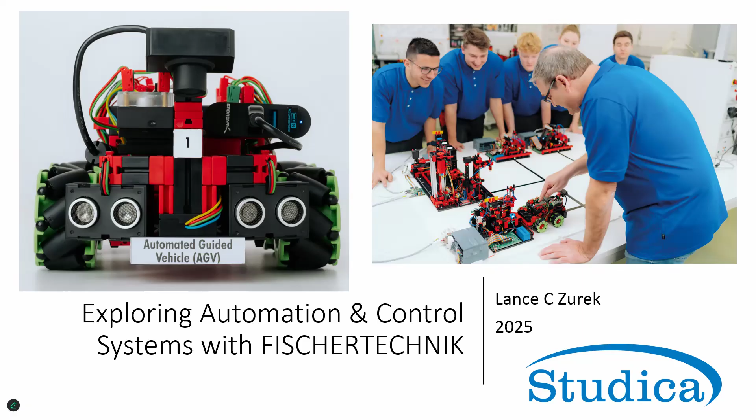My name is Lance Zurek, and I am the product manager for the fischertechnik Education Division over here at Studica. And of course, today I'm going to provide you with an overview of fischertechnik's line of pre-assembled industrial simulation and training models, including some of the very latest models, which are incorporating new cutting-edge technology.

Now, over the years, I would typically begin these presentations with a discussion of the importance of STEM education, and I would talk about things like the changes in the manufacturing environment, and of course, the growing need for highly skilled workers in the modern workforce. But at this point, I think it's pretty well established just why technology-focused education is so important.

And so with that, I'm going to basically dispense with most of the preamble and try to jump more into a discussion of what fischertechnik is and also show you each of the current models that are available in the simulation family.

Just to give you a little bit of background, fischertechnik simulation models have been designed with the intent of providing a compact, engaging, and hands-on method for teaching and demonstrating high-end automated systems. The line consists of a series of pre-assembled small-scale models which are designed to replicate both in appearance and in function various automated robotic machines and systems that are commonly used in commercial manufacturing.

Now, before we look at those models specifically, just to give you a little background on what fischertechnik is and who they are, fischertechnik has been creating tools for teaching students of all ages how technology works for 60 years, all based around their unique building system.

Now, what makes this system unique is that unlike other popular construction systems, and you see an example of their block here, with most popular construction systems, they're designed simply to stack, but the fischertechnik system is all built around a core building block that allows attachment from all six sides. And because of this, it allows for almost limitless design possibilities.

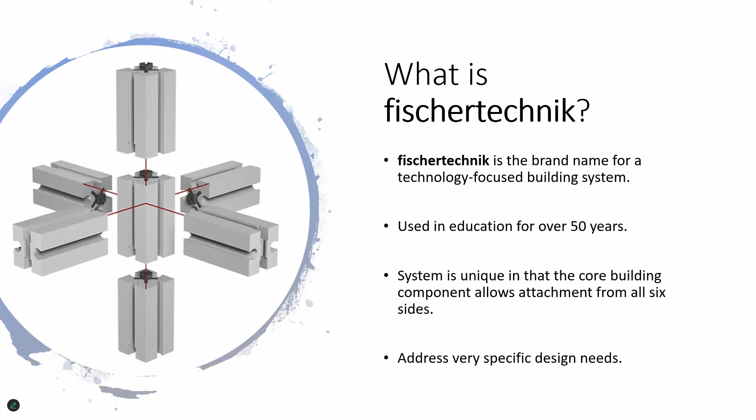The system itself was created back in the 1960s by German inventor Arthur Fischer, who, of course, the company is named after, and he's noted for countless innovations used in the construction and the automotive industries. Just to give you a couple of examples, Mr. Fischer, at the time of his death in 2016, held more patents in his name than Thomas Alva Edison had amassed during his own lifetime.

Now, prior to creating fischertechnik, Mr. Fischer was first noted as the inventor of synchronized flash photography. This was in 1949, and a few years later, he gained fame as the creator of the expanding nylon wall plug, which is used in conjunction with a screw or a bolt to help anchor heavy objects to walls. Anybody who's done anything with a house has probably worked with these.

His company, the Fischer Group, continues to employ thousands of workers all around the globe who produce many variations of fastening devices, used in building construction. Up until recently, they were also involved in producing components used in the automobile assembly process. And right now, they're very much involved in providing consulting services to companies who wish to employ state-of-the-art manufacturing processes.

Now, once again, the focus of fischertechnik building sets, and that's whether those intended for the retail market or for classroom use, has always been on helping to foster an understanding of technology and just how things work. Many of the products offered by fischertechnik for the education sector are what we would sometimes refer to as subject-specific sets, focusing on different STEM-related topic areas, things such as mechanics, pneumatics, renewable energies, robotics, and so on and so forth.

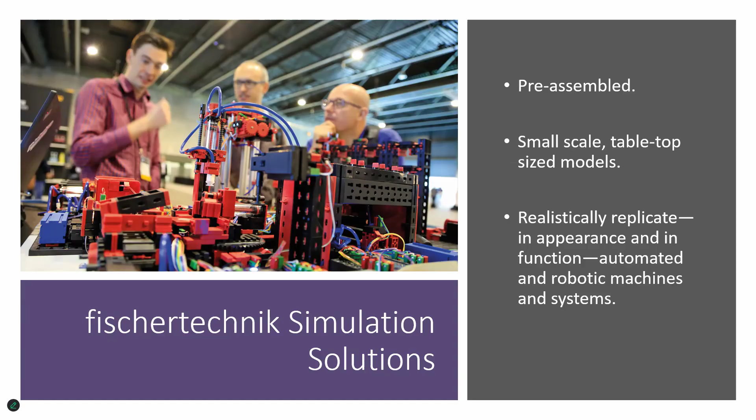These are a series of pre-assembled small-scale models, which again are designed to replicate in appearance and function various automated robotic machines and systems. This will include things like conveyor belts, punching machines, three-axis pick-and-place robotic arms, color sorting lines, and even high bay warehouse storage systems.

Now, besides these individual models, which will of course focus on specific processes, fischertechnik now also offers several variations of an integrated factory simulation model. And what you'll see with these factory simulation models is that they'll most often consist of at least four individual workstations, sometimes more. And what you'll commonly see is some sort of a gripper robot, a robotic arm, a high bay warehouse system, a multi-processing station with an oven, and a sorting line with color detection.

And in the case of these factory systems, they're designed to all work together as one self-contained material cycle. And of course, we're going to look at these a little bit later in the presentation. Now, before we get into the specific models, let's briefly outline some of the advantages of using fischertechnik simulation solutions.

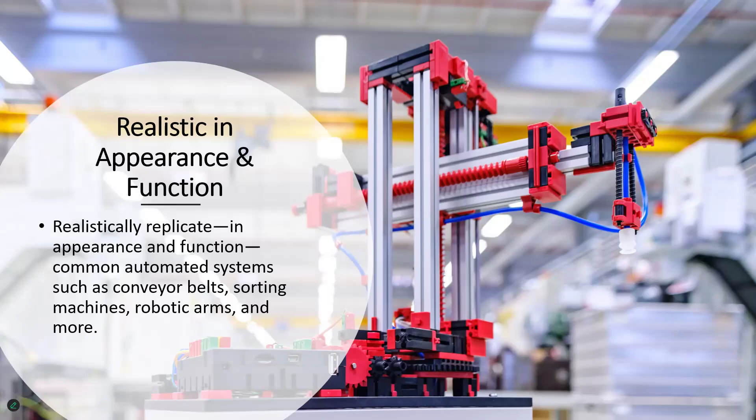First off, fischertechnik simulation solutions allow educators to offer engaging, hands-on tools for teaching, exploring, and understanding various aspects of automation and programming. Now, this can be for understanding, let's say, how automated systems work, or perhaps for having a tangible physical system to observe and work with in a programming or PLC-focused learning environment. The models, once again, are designed to realistically replicate in both appearance and function common automated systems. Again, things like conveyor belts, sorting machines, robotic arms, and so on.

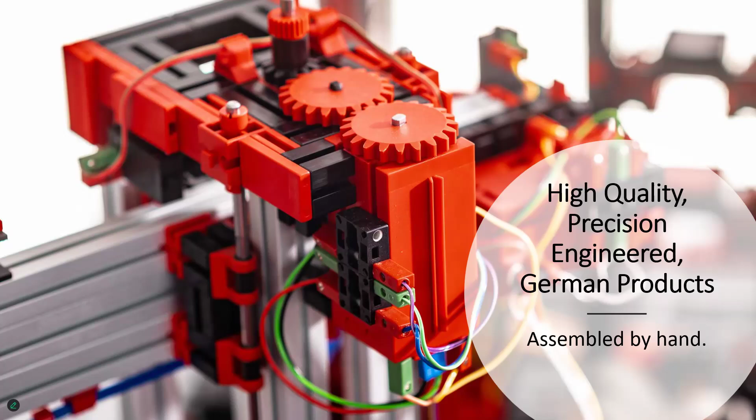Because the models are compact and in most cases tabletop size, they're not only ideal for use in the classroom or in office demonstrations, but they're also great for demonstrating software or other technology-based offerings in a trade show environment. Next big one is quality. Each fischertechnik simulation model is a hand-assembled, high-quality German-made product.

Each of the models, or I should say 99% of the models we're going to be looking at here, are available in 24-volt versions for industrial users, and there are some select models that are available in 9-volt versions as well for those who aren't versed in the use of PLCs, or that's maybe not the focus of what they're doing.

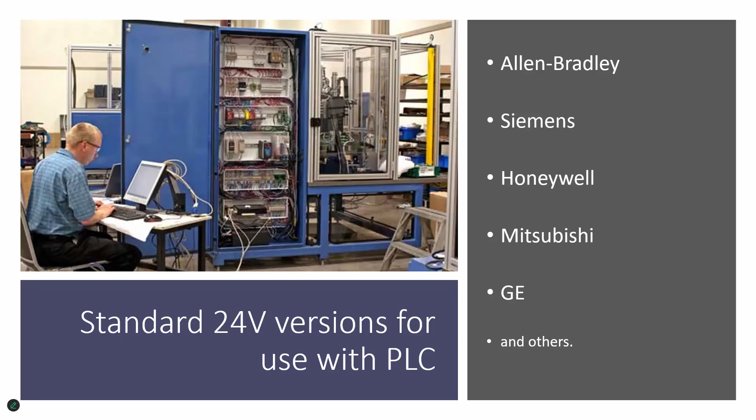The 24-volt versions, again, are designed for use with industry standard PLCs, and it doesn't really matter whether you prefer Allen Bradley controllers, Siemens controllers, or controllers from companies like, let's say, Mitsubishi or General Electric or what have you. In any case, you can use the controller of your choice with these 24-volt models. Likewise, just as you can use your choice of controller, you choose the programming language that's going to work best for your needs.

Now, do note that with many of these 24-volt models that we're going to be looking at, at least in the early part of the presentation, the PLC is not included. The programming is not included, and any additional wiring or connection boards or things of that nature are not going to be provided with the models. There will be exceptions to this when we get farther along in the presentation, and this will be some of the more elaborate variations of the training factories, the factory simulation models.

But in the beginning portion, when you're looking at some of these specialized stations, again, those will require that the end user has to provide their own PLC. They're going to have to create their own programming, the wiring, the connection boards, what have you. So please just keep this in mind, but of course we'll address it as it comes up.

Now, as I mentioned, we've got select 9-volt versions available. If you're not involved in industrial use, the 9-volt versions are controlled by the RoboPro graphic programming software, which is fischertechnik's proprietary software, and they use fischertechnik robotics TXT controllers. So if, for example, you are not interested in getting into programming PLC languages, and you want to work with something that's a little more accessible, let's say for a high school CTE program, the 9-volt versions would probably be a better choice for you.

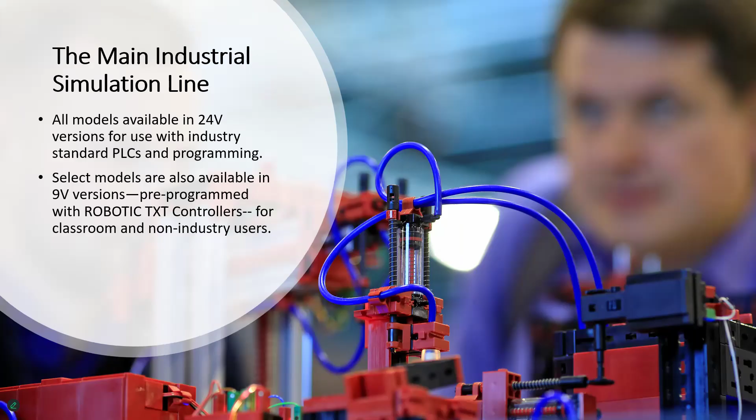So with that being said, let's look at each of the models which are currently available. Now, we are going to begin with a look at some of the more basic modules, and we're going to work our way up to the more sophisticated models, things like the factory models, which I touched upon, which again will include several workstations designed to work as an entire production cycle.

And so we're going to start off with a basic conveyor belt. This is a transport belt with a length of 275 millimeters, and it's used to transport work pieces that can have a diameter of up to 29 millimeters. If you wish, you can connect multiple conveyors to increase the length of transport as desired. There are instructions that come with that. Components on this model will include an encoder motor, a push-button limit switch, two phototransistors, and two LED light barriers.

The dimensions of the model are approximately 14 by 10 by 4 inches, and it has a weight of just about 2 pounds. It's available in a 24-volt version with a multi-pin connector. I'll mention the specifics: it's a 26 pin with a 2.54 millimeter grid, as shown here. And again, the 24-volt version of this model, as well as many of the 24-volt models we're going to be looking at in the early part of this presentation, require you to provide the PLC, the programming, wiring, etc.

Now, there is also a 9-volt version, which, as I mentioned before, is connected to a pre-programmed robotics TXT controller. In this case, you will need one power adapter to power the controller itself.

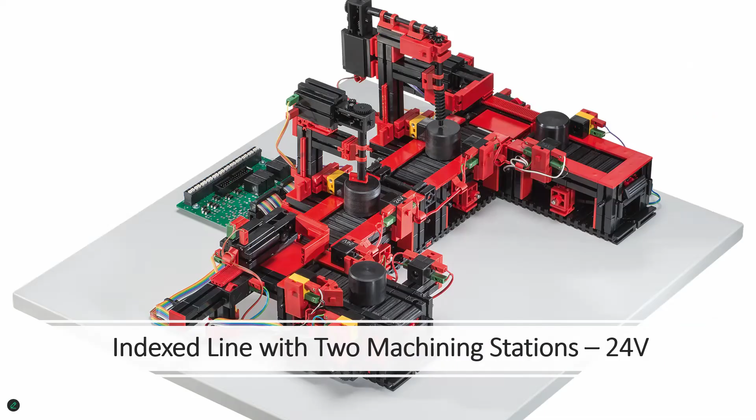The next model we're looking at is another one that I will tell you is outgoing right now. It's about to be replaced by something else, but there are still some in stock, so we will talk about it. It's an indexed line with two machining stations. It features a U-shaped conveyor line consisting of a milling and a drilling station, and it has 4 conveyor belt sections.

Components on this model will include 8 axis motors, 4 push-button limit switches, 5 phototransistors, and 5 LED light barriers. It has dimensions of 19 by 18 by 11 inches. It has a weight of about 8 pounds.

And again, the 24-volt version has a 26-pin connector with a 2.54 millimeter grid where you provide the PLC and the programming. There is a 9-volt version that comes pre-wired to 2 pre-programmed Robotics TXT controllers, so you will require 2 power adapters for this one.

Next up is a variation on the idea of a pick-and-place robot, and they call it the 3D or 3-axis robot. The 3-axis robot has gripping forceps, which it uses to quickly and precisely position the workpieces that it picks up in 3-dimensional space. Degrees of freedom for this robot are as follows. Axis 1 turns 180 degrees. Axis 2 can move forward or back 90 millimeters, and Axis 3 can raise or lower 150 millimeters.

Components used on the model include 2 axis motors, 2 encoder motors, 4 push-button limit switches. It has dimensions of approximately 19 by 16 by 9 inches, and a weight of just about 6 pounds. Again, the 24-volt version has a 26-pin connector with a 2.54 millimeter grid, designed for use with the PLC and the programming of your choice. The 9-volt version comes pre-wired to a pre-programmed Robotics TXT controller, and requires 1 power adapter.

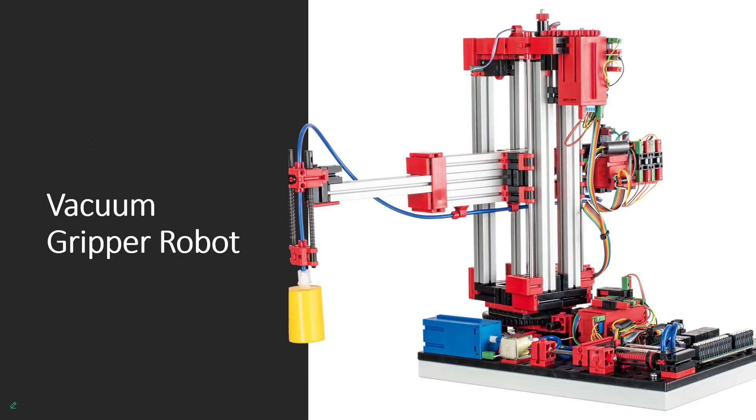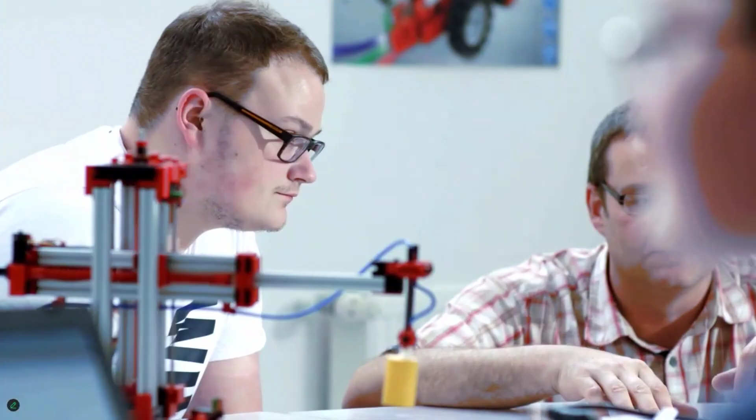Next up is the vacuum gripper robot, another variation on the pick and place robot. And starting here, we get to show you some videos of the models in action, which I think is probably a lot more useful. As you're going to see here, the vacuum gripper is a 3-axis robotic model with a vacuum gripping device built onto it. Just like the model we just looked at, it's designed to precisely pick up and position workpieces in 3-dimensional space.

The model here will include 3 encoder motors, 3 push-button limit switches. It has a vacuum suction device, a compressor, and a solenoid valve. Dimensions are 9 by 19 by 15 inches. This one has a weight of 7 pounds.

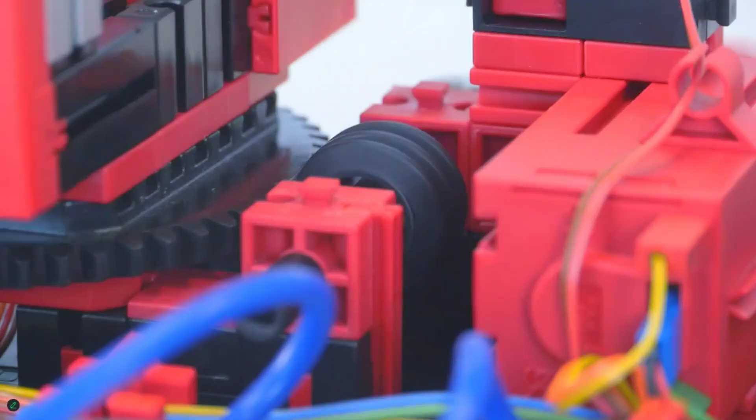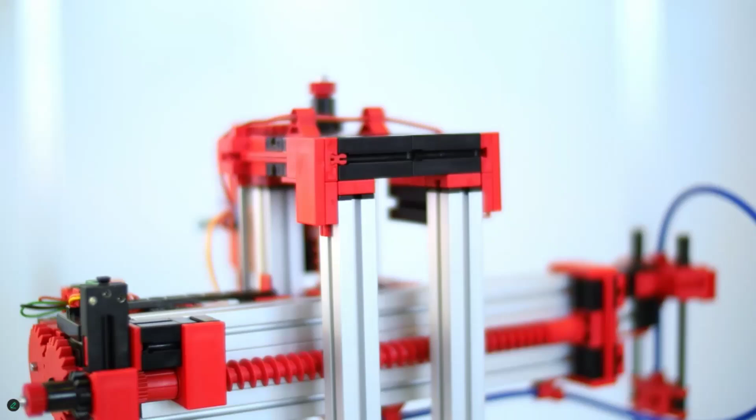The 24-volt version of this model, as with many of the 24-volt versions we're going to be looking at moving forward, has a relay board for motor polarity reversal and a multi-pin connector. In this case, we start changing to a 34-pin with a grid of 2.54 millimeters for those keeping track of these things, as well as additional PCB terminals with push-in connections for all inputs and outputs. Again, the 24-volt version will require you to provide the PLC and the programming. There is not a 9-volt version available right at this time, so 24-volt only. We'll let this play through for a minute before we move on.

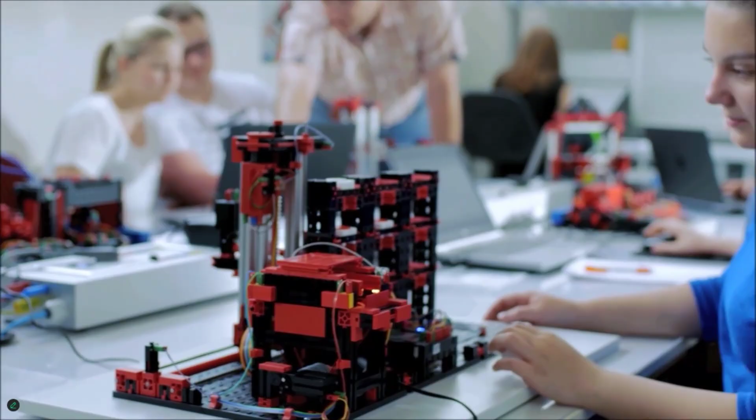And I think you have an idea there. So the next model we're going to be looking at is the automated high bay warehouse that you've heard me touch upon. The model features a transfer station with a conveyor belt, along with a shelf stacking mechanism for storing and retrieving workpiece carriers, and 9 individual storage spots for the workpiece carrier trays with the workpieces. The components include 2 encoder motors, 2 mini motors, 4 push-button limit switches, 2 phototransistors, 2 LED light barriers, and a selection of different colored workpieces along with the carrier trays for each.

Now, I will mention that this model is a favorite for those who are involved in teaching PLC programming. The reason I've heard is because it offers a lot of very specific types of coding that has to be done, with the precision of how the picker mechanism has to work, how the arm has to retrieve the workpiece in the carrier tray and slot it into the different heights and different places in the storage bins over here. So because of that specificity, it offers a lot of programming challenges.

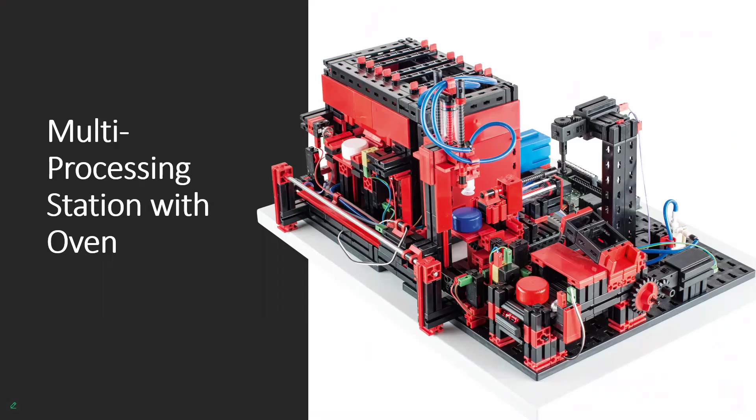Dimensions are 19 by 28 and a half by 15 inches, with a weight of 18 pounds. Again, the 24-volt version has the relay board for motor polarity reversal, the same 34 pins with a grid of 2.54 millimeters, and the PCB terminals with push-in connections for all inputs and outputs. You provide the PLC and the programming, and there is a 9-volt version that comes pre-wired to the TXT controller.

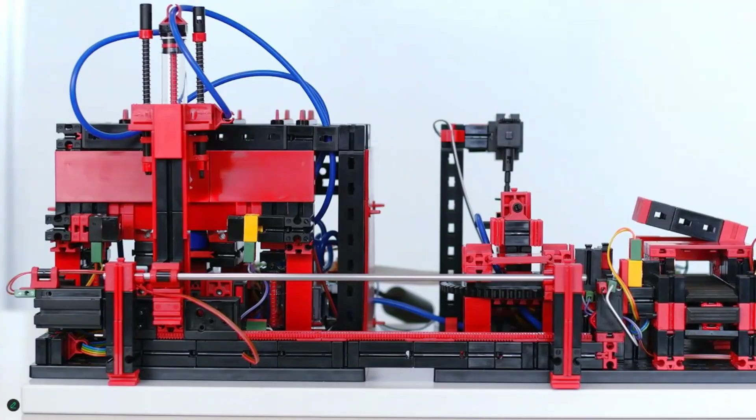The next model we're looking at is the multi-processing station with oven. What you're going to see here is a furnace simulation with a pneumatic sliding door. Essentially, there's a downstream processing station with a pneumatic transfer unit that includes a vacuum gripper, a cutter with a rotary table, and a conveyor belt. Components include 4 mini motors, 6 push-button limit switches, 2 phototransistors, 2 LED light barriers, 4 solenoid valves, and a compressor. The dimensions are approximately 20 by 14 by 12 inches, and it weighs about 11 pounds.

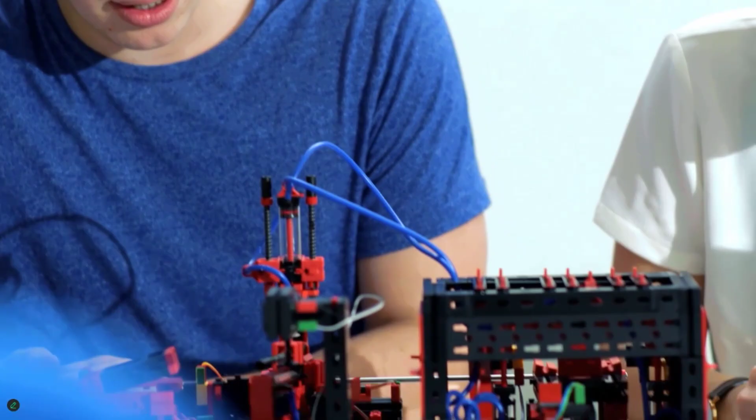It's available in the 24-volt version for use with the PLC programming of your choice. It has a relay board for motor polarity reversal and a multi-pin connector, 34 pins with a 2.54 millimeter grid, as well as additional PCB terminals with push-in connections for all inputs and outputs. The 9-volt version in this case is connected to Robotics TXT controllers, so 2 power adapters will be required if you purchase the 9-volt version. We'll let this play out a little bit here, and then we'll move on.

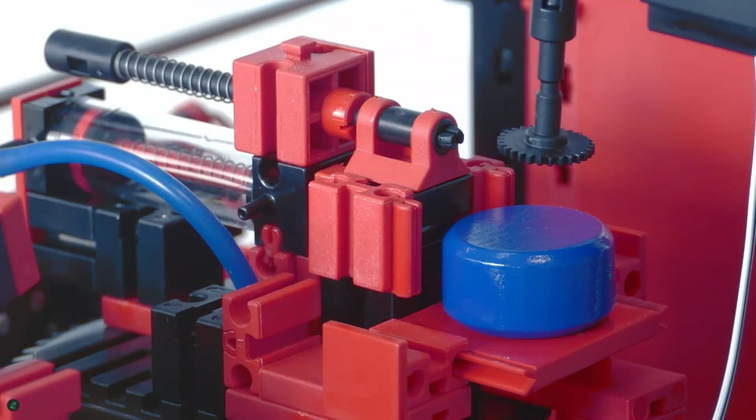Of course, the simulated processes and the delivery of the workpiece.

The next model we're looking at is the sorting line with color detection. And what you're going to see here is basically a simulation of a system for detecting workpieces of different colors that sorts them via conveyor belt into 3 different storage bins. Components found in the model will include 2 mini motors, 5 photo transistors, 5 LED light barriers, 3 solenoid valves, a compressor, and an optical color sensor.

The dimensions for the model are approximately 20 by 14 by 12 inches, and it has a weight of 10 pounds. Again, the 24-volt version has a relay board for motor polarity reversal and the multi-pin connector, again, 34 pins with a grid of 2.54 millimeters, as well as additional PCB terminals with push-in connections for all inputs and outputs. Again, the end user provides the PLC and the programming.

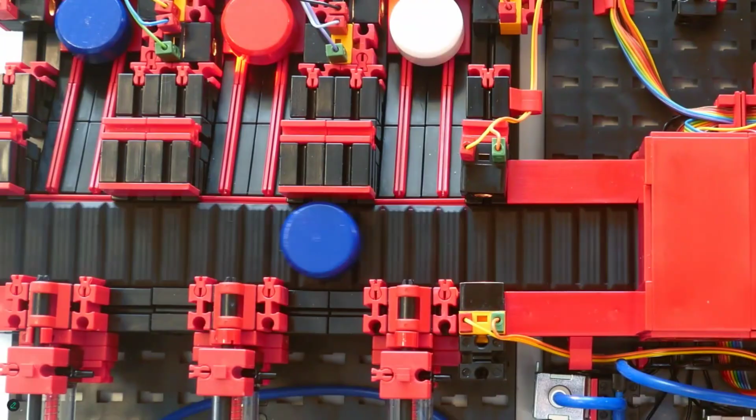A 9-volt version does come wired to 1 pre-programmed robotics TXT controller, and so 1 power adapter will be required for that. And of course, we'll discuss the power adapter and all that as we get to the end of the presentation. We'll let this do a little sorting, and then we will move on to the next one.

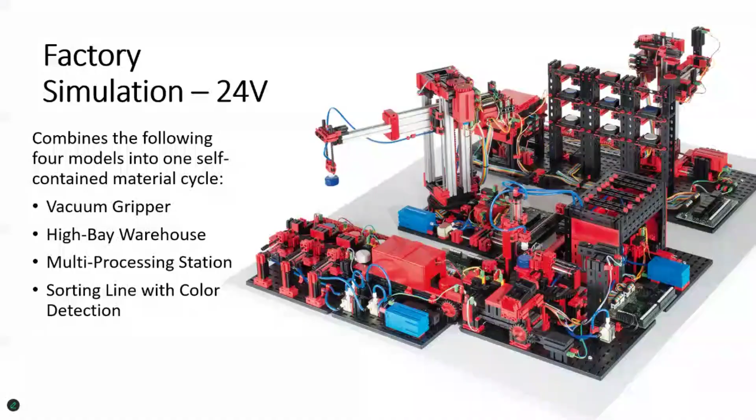And all done. The next model we're looking at is the factory simulation. This is the first of the factory simulations we're going to be looking at today. And this one combines the last 4 models that we reviewed. Again, the vacuum gripper, the automated high bay warehouse, the multi-processing station with the oven, and the sorting line with color detection. It combines these 4 models into one self-contained material cycle.

And the cycle that you're going to see in the following video works like this. Workpieces have been stored in the automated high bay warehouse where they're retrieved using the vacuum gripper robot. The vacuum gripper then moves the pieces to the multi-processing station with the oven, and after the workpiece has been processed by that station, it is then sorted by color in the sorting line with color detection before it's again moved by the vacuum gripper robot back to the automated high bay warehouse for storage.

Now, as we've already discussed the components of each of these models previously, I'm not going to belabor it by restating them here, but I do want to mention the dimensions of this model as a whole. Again, because it combines four individual workstations into one work cycle, it does take up a much larger footprint. In this case, we're talking about 39 by 31 by 16 inches for the factory that's mounted on the board as it is, and it has a weight of between 43 and 46 pounds, depending upon whether you're talking about the 24 volt or the 9 volt version.

Due to these dimensions, and this will pretty much play out for any of the factory models we're going to be looking at today, any of the factory models can only be shipped flat as freight on a pallet. There is going to be an optional storage case that we'll talk about when we get to that. But again, keep in mind that these are always going to have to be shipped as freight.

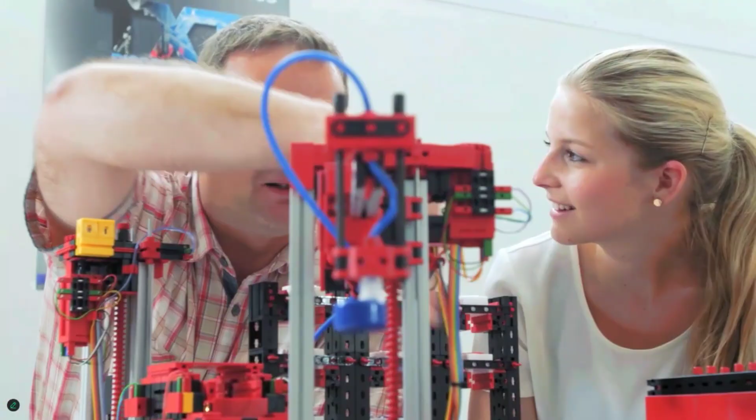Also, in the case of the 9 volt version, it's going to be wired to 5 robotics TXT controllers, and so it's going to require, in that case, 3 power adapters. And of course, again, the 24 volt version requires you to provide the PLC and the programming and other hardware that may be needed.

The case itself consists of an aluminum case maker profile and has plastic plates and steel ball corners, along with 4 steel tilt handles and angle protection corners. The upper section of the case, as you'll see, is partially lined with soft foam blocks in different heights, and this will help to cushion the model.

And it also has 3 internal zipper pockets, and this is used for storing the cables, the work pieces, and the other accessories that are used with the model. The lower portion of the case is lined with harder foam, and it's designed so that once the top of the travel case is removed, the model on its board can remain in that bottom section of the case and be fully functional. The case itself has exterior dimensions of approximately 41 by 33 by 17 inches, and it has an unloaded weight of 53 pounds.

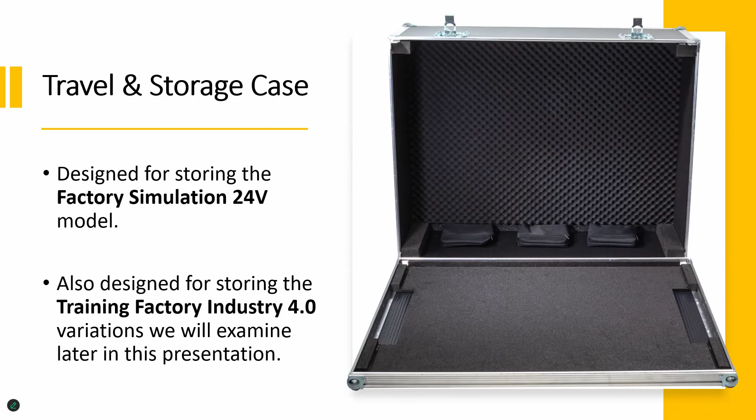So basically, if you put a factory model in there, you're going into the upper 90s, 90 to 100 pounds for the full case with the model. Do keep in mind that even when you use the travel case, these models should always still be shipped flat, and even with the travel case, you still want to ship this on a pallet to protect everything from any kind of damage in transit, because obviously it's important to protect these models. They are delicate.

The next group of models we're going to be looking at focus specifically on the area of IoT, and these are referred to as the Training Factory Industry 4.0 models. This group of models was designed to help address how the recent changes in industrial production, which were driven by digitization, have created a need for stronger networking and more relevant information on all production levels. Now, with this Industry 4.0 update of the factory simulation model we just looked at before, such digitization activities can be simulated, learned, and applied on a small scale before they are implemented, of course, on a larger scale.

Now, as the following video provides a really nicely narrated overview of how the factory works and different technical aspects that are important to know, I'm going to step back for a moment and allow you to watch and listen to the narrator. So here you go.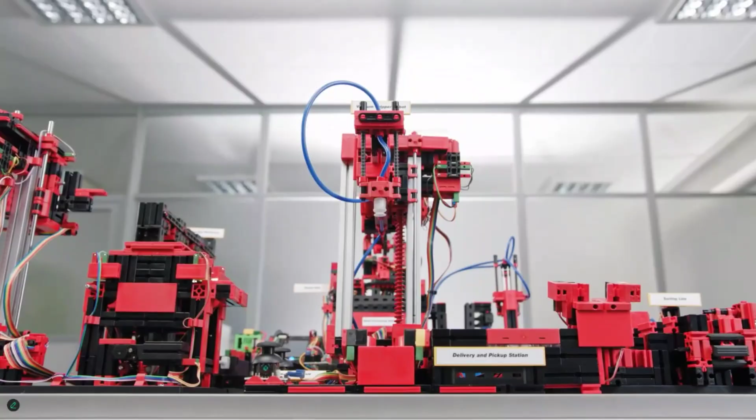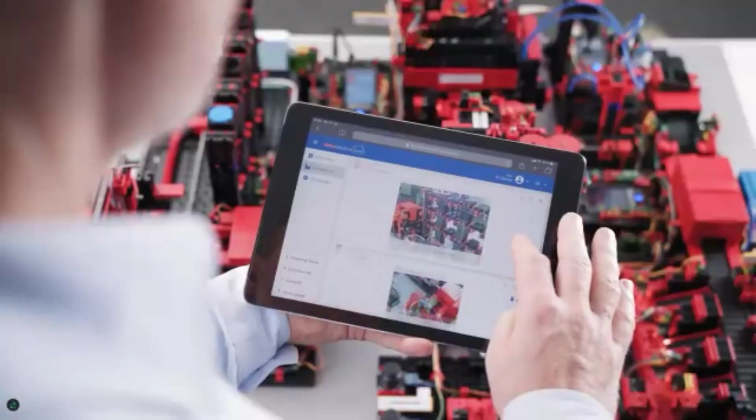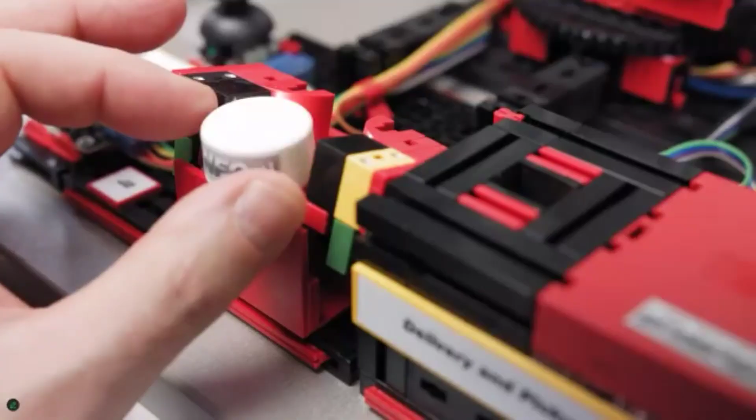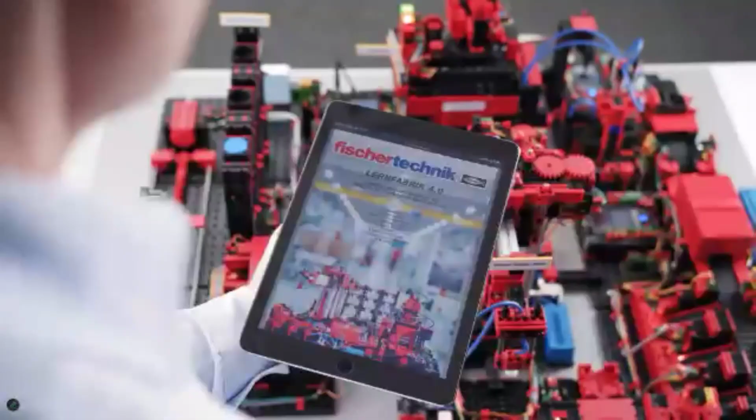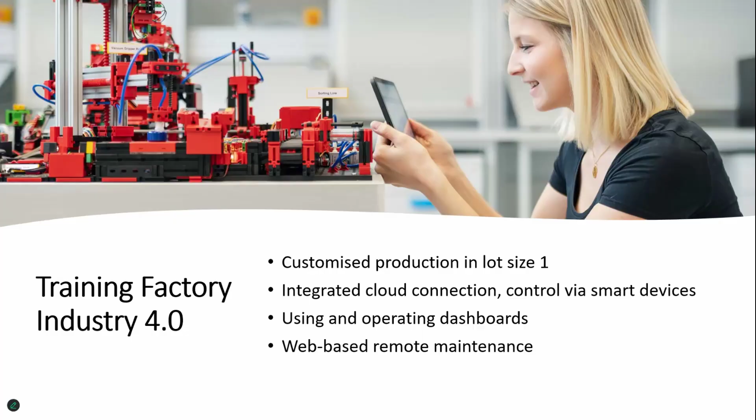integrated cloud connection and control via smart devices, using and operating dashboards, web-based remote maintenance, linking of production and materials planning data, and the connection of upstream and downstream logistics processes.

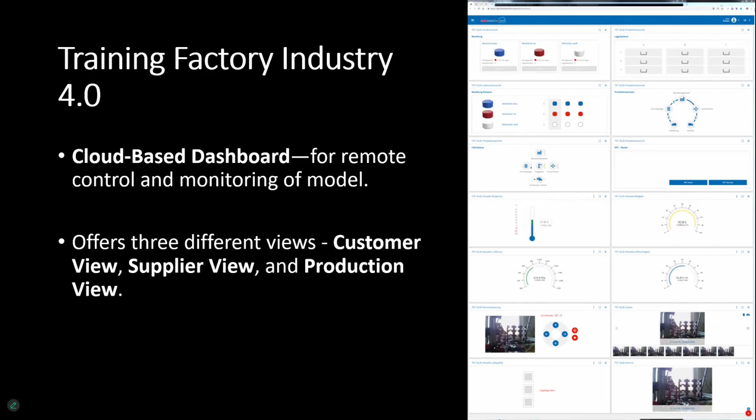Now, as you just saw, the model incorporates many features not found in the models that we previously discussed, perhaps most notably the use of the cloud-based dashboard for monitoring and controlling the model. Some other examples would be the camera that's used for visually monitoring the factory functions from the cloud-based dashboard, as well as the environmental sensor, which collects data on variables such as, again, temperature, air quality, humidity, and air pressure.

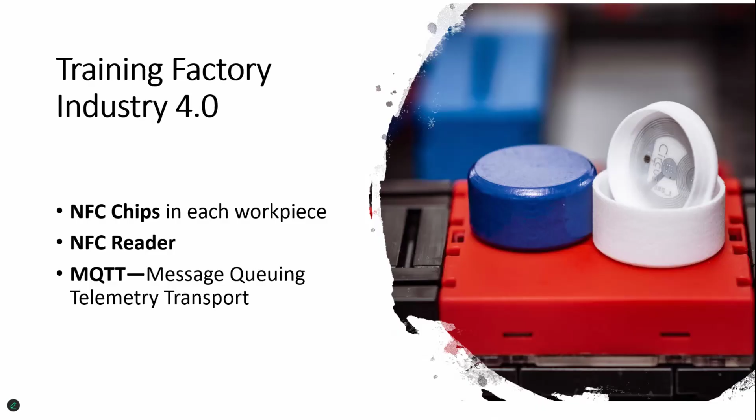The use of NFC chips in each workpiece enables the position of each workpiece in the work cycle to be mapped, and the use of MQTT, or message queuing telemetry transport, allows the network TXT controllers to communicate with each other.

Now, in regards to the 24-volt version specifically, I should note that it is a bit of a hybrid in that while requiring a PLC for operation and control, it does also incorporate one Fischertechnik Robotics TXT controller. In this case, the TXT controller serves as the MQTT broker and interface to the Fischertechnik cloud. Communication between the PLC and the TXT controller is carried out using an IoT gateway via OPC UA.

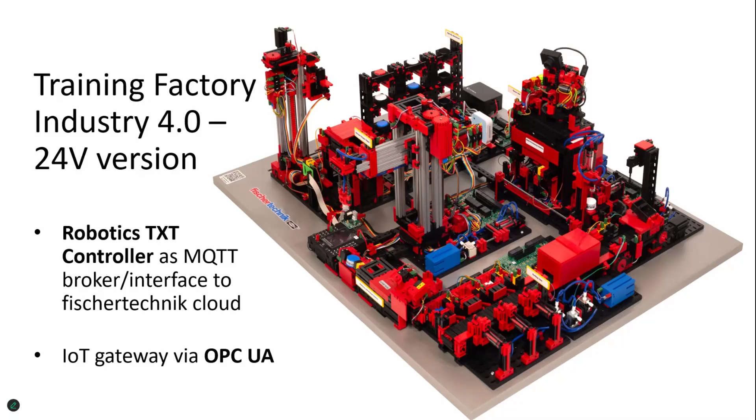OPC UA, which is also known as OPC Unified Architecture, is of course a standard for exchanging data across different platforms. In addition to the TXT controller used here, there is also an IoT gateway using Raspberry Pi with Node-RED. And this will allow the option for not only presenting and using data on the dashboard in the Fischertechnik Cloud, as you saw before, but also being able to display data and calibrate the stations of the factory in a Node-RED dashboard.

The model also incorporates newly developed 24-volt adapter boards to interface to the PLC. And these, of course, will ship as part of the assembled training factory and are connected to the PLC via terminals. Now, among other things, this latest generation of adapter boards allows for the speed of the encoder motors to be controlled via PWM or pulse width modulation. And they also have push-pull output stages for phototransistors and for buttons.

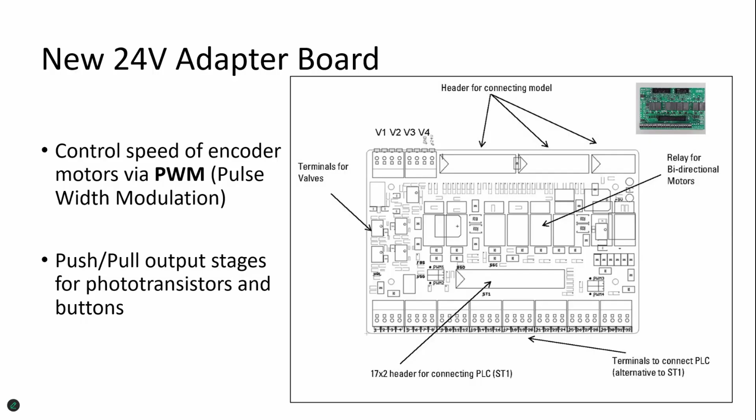Now, unlike the previous 24-volt models that we've discussed, the new 24-volt Training Factory Industry 4.0 includes access to a sample program. In this case, the program is in structured text format, and it's created around a Siemens S7-1500 PLC. The program is available for download on GitHub. Of course, the new training factory can also be controlled with other PLC models and brands once the end user makes some adjustments to the sample program. To do so, the source code needed for this is also available for download from GitHub.

Now, all of this information that was presented in the video, as well as all that I'm talking about here, is included in the 152-page PDF manual, which you can download from the Fischertechnik website. And it's also available, again, from us directly upon request. So if you don't find it on our website or the German website, you can simply email me and I'll provide information on that at the end. And I'm happy to get that to you, even when you're in the consideration process, just so you can see the ins and outs of the factory.

I will also mention that as of last year, there are now 2 additional versions of the 24-volt model, and we're going to discuss those 2 options when we get to the pricing portion very shortly. Now, in the case of the 9-volt version of this model, the control is facilitated through the use of the 6 robotic TXT controllers. Again, with the 9-volt version, all the programming is preloaded, so essentially once the connections to the internet and the cloud-based dashboard are made, all of which is clearly outlined in the downloadable documentation PDF that accompanies this specific model.

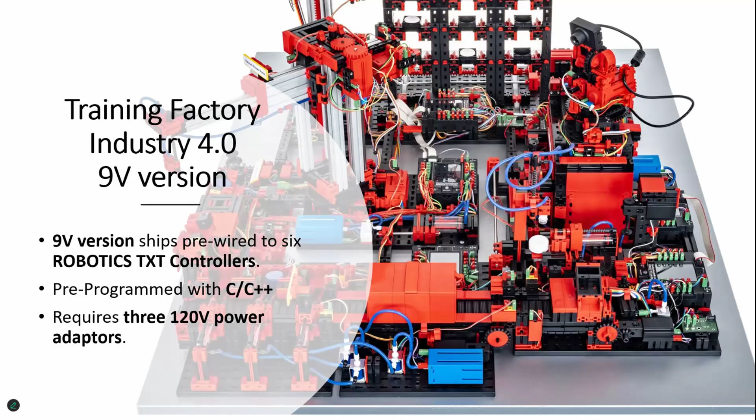Just to finish things up, the dimensions for the model are approximately 39 by 31 by 16 inches, and they have a weight of between 51 and 53 pounds, depending upon whether you're talking about the TXT version or the PLC version. As with the 2 factory simulation models we discussed previously, we do recommend the optional travel case, of course, to help protect the model during transport or storage. And that's the Training Factory Industry 4.0 model, which is again available in both 9-volt and 24-volt versions.

We do have more models to talk about, though. These were recent additions to the fischertechnik line. This model incorporates the cutting edge technology that's quickly becoming a part of our daily lives. And by that, I mean, of course, AI. This is called the Quality Control with AI System Model, and it's ideal for visualizing this complex subject area in a hands-on manner as it creates a sustainable learning experience by linking theory and practice. With this, processes can be sped up, fault rates and costs minimized, and fault evaluation can be standardized.

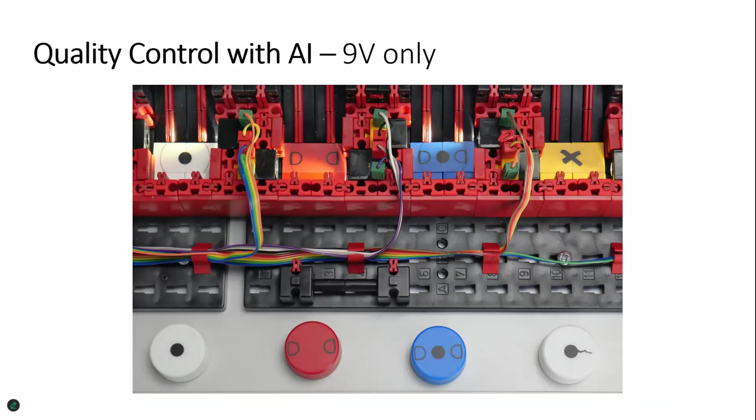It's a fischertechnik sorting line that comes with workpieces in 3 different colors. In this case, the workpieces are marked with 3 different processing characteristics as well as various fault patterns. What happens is that the workpieces are scanned by the camera and they're classified with the aid of the trained AI. Now, depending upon the color, the feature, or the fault pattern, the workpieces are then sorted by the artificial intelligence on the basis of the quality features. So whether it's the color or whether it's a faulty piece.

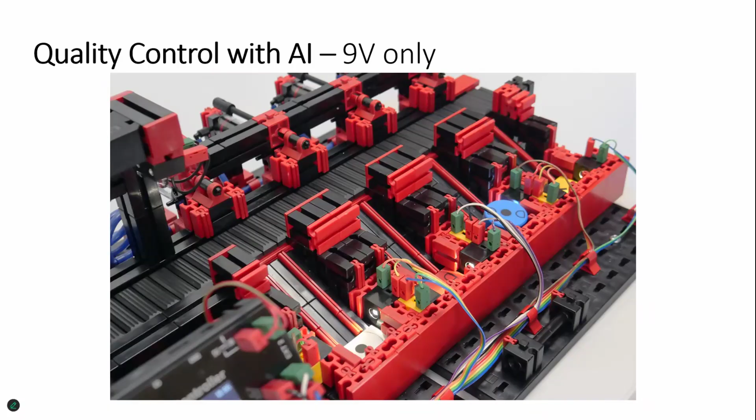The AI used here is realized with machine learning in TensorFlow, where an artificial neural network was trained with image data. The learned AI is executed on the fischertechnik TXT 4.0 controller, and the model sequence control is implemented in the RoboPro coding programming environment and also in Python. Now, if you want to go a step further, you do have the option of generating your own AI applications, and in this case, the training is done in Python, for which a sample project is provided for explanation.

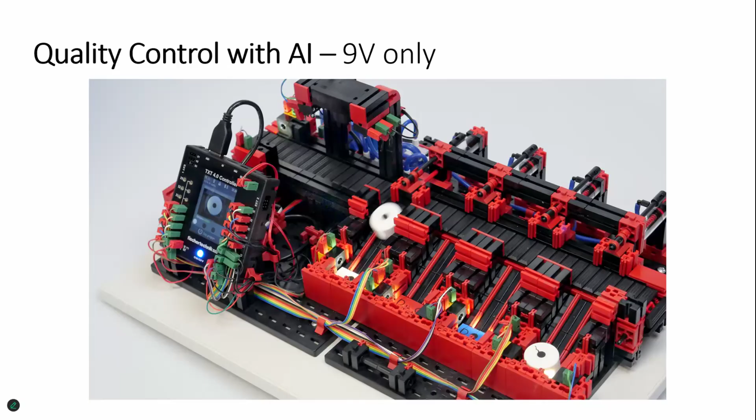And that essentially is the new quality control with AI model. It's an ideal training, simulation, and demonstration model for education and for research. And it's great for the visualization of AI systems, machine learning, and neural networks. It is available only in a 9-volt version at this time. It may be possible that you'll see a 24-volt version down the road, but for right now, because of certain technical needs, it's 9-volt only. It does require 1 power adapter, which of course we'll talk about shortly.

The next model we're going to look at is another recent release. This is the Agile Production Simulation model, which is the very latest version of the factory, but this time not only incorporating IoT and state-of-the-art manufacturing processes, but also AI, as we just looked at, and this time with a digital learning platform included as well. Now, the factory of the future is the subject of numerous research projects in science and industry. Forward-thinking companies rely on automation, modularity, artificial intelligence, and agility, all of which they need to remain competitive. Now, in order to promote these topics in industry and research, students, apprentices, as well as employees all require the corresponding know-how and awareness about how to deal with these kind of complex issues.

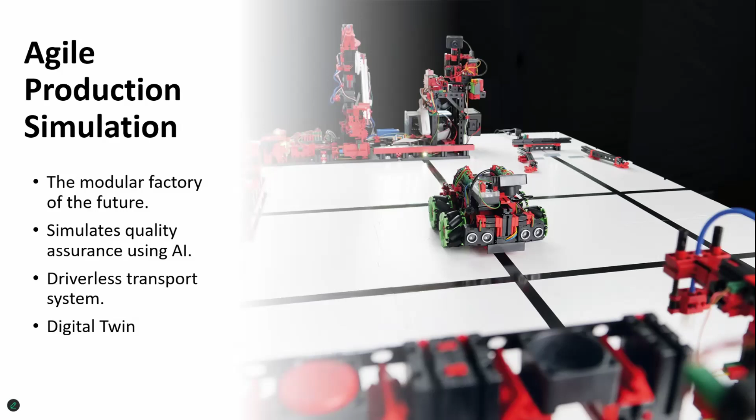So for right now, you're going to see slides. Hopefully, we do hope to have, again, a narrated video of this to provide shortly. But essentially, let's begin again with the incoming and outgoing goods station. This is, of course, where the material flow of a workpiece begins and ends. What happens here is the raw material is delivered at the goods receipt slot.

It's positioned on the color sensor for quality control using the 6-axis, and this is a new feature here specific to this model, the use of a 6-axis robotic arm with a vacuum gripper, and then the workpiece is encoded on the NFC reader. The robot then places the workpiece on the automated guided vehicle, or the AGV, for further transport. So this gripper arm takes the workpiece after it's been checked out and it puts it onto the back of this automated guided vehicle.

This module also contains the central control unit, which is a Raspberry Pi, and it also contains the environmental sensor, which of course measures the different environmental conditions on the factory, much like we saw in the previous model. There's also an integrated movable camera, which again can be swiveled in 2 axes and provides an insight into the entire factory floor via the Fischertechnik cloud-based dashboard, which again we just saw an example of.

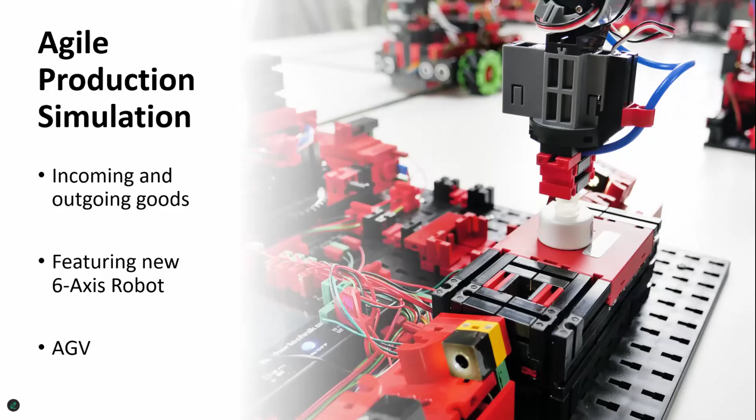Now, at the end of a cycle, as I mentioned, this is where the workpiece begins and ends in the process. At the end of the cycle, a finished workpiece is also delivered at the goods station by the AGV after it's had all the processes performed on it that need to be. But typically, if a workpiece was entering the flow, it would start here, and the next stop would often be the high bay warehouse.

Although, because this is set up to be an agile production simulation model, you could switch up the order of what stations a workpiece would need to go to, or if it needs to skip certain stations or go back to certain ones, however you might choose to do that. That is one of the nice little perks of working with an agile production simulation, because you're trying to show that, because of all the variables that are required in production of anything these days, you may skip certain workstations or what have you.

But in any case, the high bay warehouse contains 9 slots for workpieces. It has a stacker crane of its own and its own vacuum gripper that picks up the workpiece from the back of the AGV, the automated guided vehicle, once the AGV has hit the docking station of this model, and it hands it over to its stacker crane for storage. The workpiece is then placed in a workpiece carrier tray for storage, and retrieval from the warehouse is done according to the first in, first out principle.

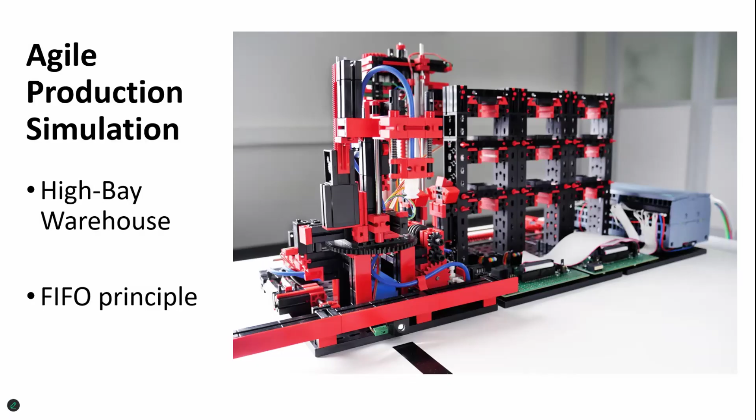If it was moving right along, normally it could go to either the drilling or the milling station. The drilling station consists of a docking station for the AGV, and a vacuum gripper that will pick up the workpiece from the back of the AGV and put it onto a conveyor belt where the workpiece gets transported under the drilling head. The simulated drilling process occurs. Then the workpiece is transported back on the conveyor belt, where the gripper arm will pick it up and put it back onto the AGV, where it can go to the next station, in this case, the milling station.

And this again has a docking station for the AGV and its own vacuum gripper that places the workpiece onto a conveyor belt from where it is transported under the milling machine. Here, the milling of 2 pockets is simulated on the workpiece. After this, the workpiece is placed back onto the conveyor belt, transported back to the gripper robot at this station. That gripper robot moves the piece back onto the automated guided vehicle for its next stop, which could be the quality assurance with AI, a variation of what we just looked at before.

So when it hits this station, the quality assurance module, a vacuum gripper robot places the workpiece from the AGV onto a conveyor belt where it's transported underneath the camera and scanned just like we saw before. The workpieces here come in three different colors, red, white, and blue, with three machining characteristics printed on them: drilling, milling, or drilling and milling, as well as various fault patterns.

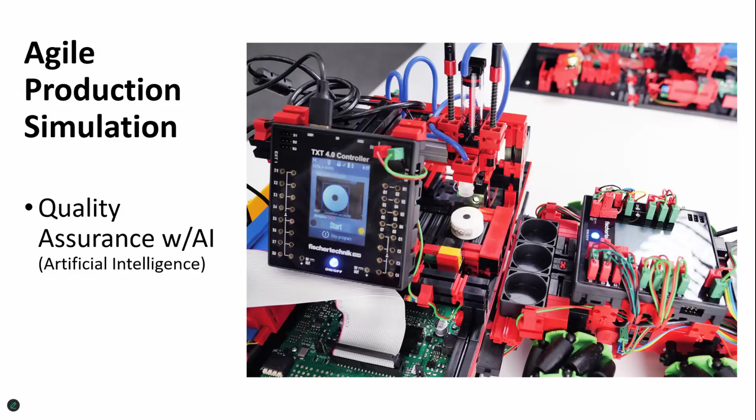The vehicle has omni wheels, which allow it to move in all directions. Two buttons and a photo transistor help the vehicle dock to the individual factory modules, and the AGV receives its driving commands from the central control unit, which is an industrial standard VDA 5050, and it uses a fischertechnik rechargeable battery pack as its power supply.

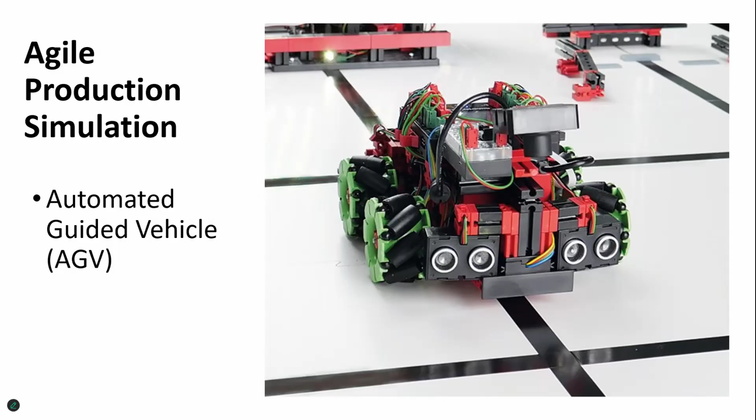Now, when the battery pack on the AGV runs low, the AGV automatically navigates towards the charging block where it is automatically charged with a charger with charge monitoring. Contacts on the bottom of the charging station connect the AGV with the charging electronics.

So moving right along, we're just going to quickly review some of the technical specifications. It's a 24-volt power supply here, 11 amps. Central control is via the Raspberry Pi 4B. The individual modules, each of the individual workstations we saw, are controlled with the help of five different SPS Siemens S7 1200 PLCs, which are included. So each of those workstations already has a PLC included, a Siemens S7 1200 PLC.

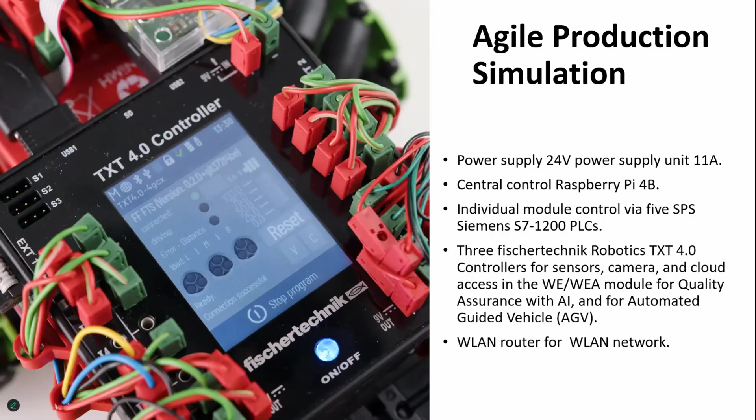In addition to this, the model also incorporates three fischertechnik TXT 4.0 controllers, which are used for controlling the sensors and the camera, as well as to facilitate the cloud access in the WE/WEA module for quality assurance with AI, and as well as for the automated guided vehicles. It has a WLAN router for WLAN network.

Software used on the APS model include SPS programs and structured text for the PLCs, TypeScript for central control of the Raspberry Pi, Node-RED for communication between the SPS and the fischertechnik TXT 4.0 controller, Python for programs on the TXT 4.0 controllers, and TensorFlow for supervised learning and quality assurance with AI.

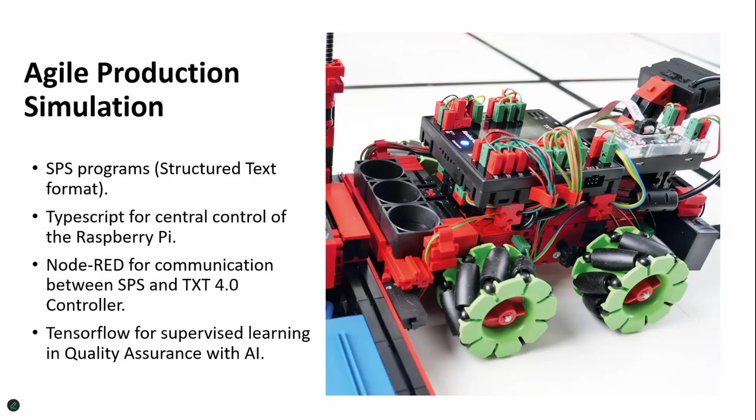Now, again, there is also a digital learning platform with a digital twin of the APS model so that learning can be done with both the actual model as well as in a virtual way. There's a lot more detail with this one to cover.

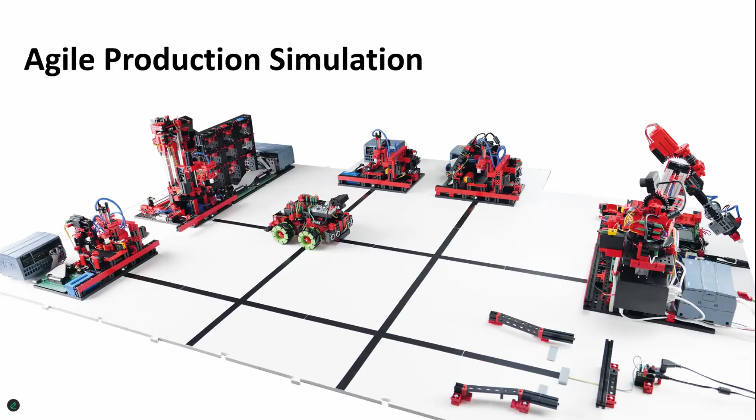But for now, this kind of gives you an overview of what it's about. So we've come to that part of the presentation where you may be wondering what these things cost. So we're going to give you a little overview along with the pricing for each.

I will also mention too that, of course, as we live in the U.S., yes, tariffs are becoming a factor. The pricing shown here is pre-tariff, and if you're interested in any of these models, if you act soon, you can still obtain the pricing that we're going to be showing here. But in the near future, as we get a month or two away, you're probably going to see that the tariff pricing is going to start affecting things. So it's the way things are. But for right now, what you're seeing over here will still be available at the price shown.

So, reviewing with pricing. Conveyor belt in the 24-volt version, that is $359.95. That requires that you provide your own PLC and programming. The 9-volt version that comes with the TXT controller is $518.95. Punching machine with conveyor belt is only available in the 9-volt version right now, $599.95. That comes with the TXT controller. The version for the PLC is completely unavailable at this time.

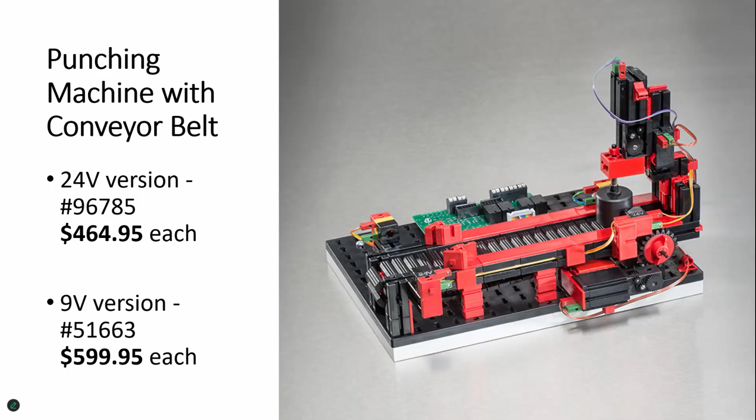And again, I'm just thinking about what I had mentioned at the top of the presentation about these being very cost-effective models compared to what you're going to see available in the marketplace. And again, you're talking about things that can go for 60, 70, 90, $100,000. This is very, very affordable. These are all very affordable prices.

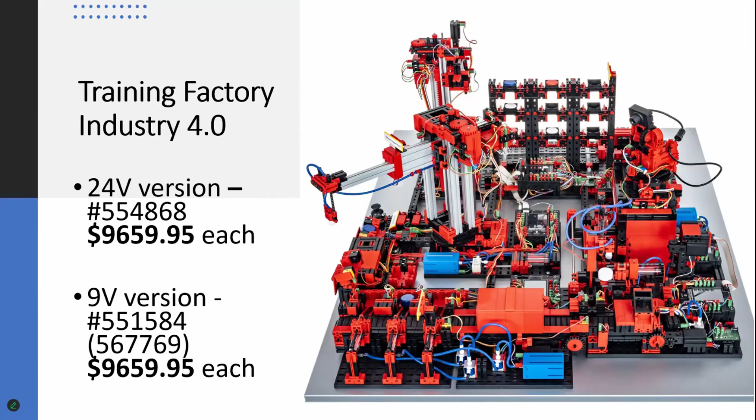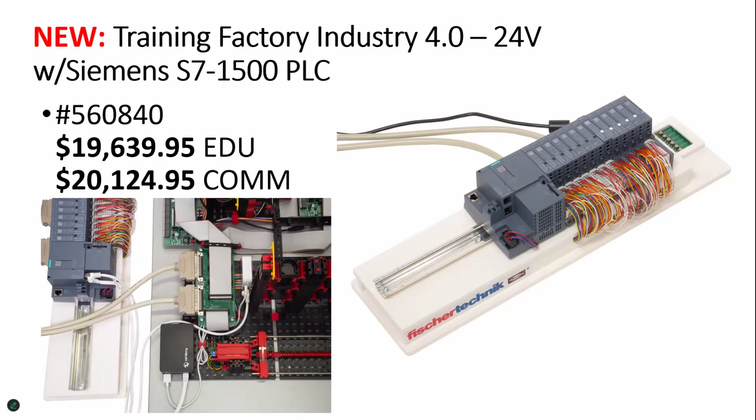Or if you're looking for the PLC, in this case, you can get a variation where it does include the Siemens S7 1500 PLC with that. So you'll get the PLC, you'll get the connection board, you'll get the wiring, you get the model, you get, of course, the sample program and structured text, which is designed to work with the Siemens S7 1500 PLC. So this is pretty much as ready to go as you're going to get. If you're an educational institution ordering this, your cost is going to be $19,639.95. If you're a commercial user, you're looking at a cost of $20,124.95.

So again, if you just want the PLC connection board version, and you're going to provide your own PLC, you're looking at a cost of $12,879.95. And again, if you get the version with the Siemens PLC, the S7 1500, if you're an educational user, it's $19,639.95. If you're a commercial user, it's $20,124.95. And again, prices will be going up because of the tariffs, so lock this in the next 30 days if you want to act on these.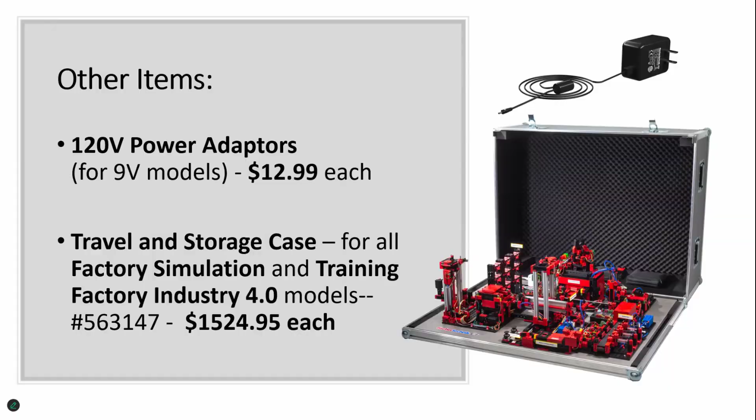Other items to discuss. The power adapters are $12.99 each. These are the ones that you would use with the 9-volt models, as I mentioned. So some of them will require one, some will require three. So that's an additional thing to keep in mind. Travel and storage case. This is the one that's used specifically for the factory simulation and the Training Factory Industry 4.0 models. The cost for that case currently is $1,524.95 each.

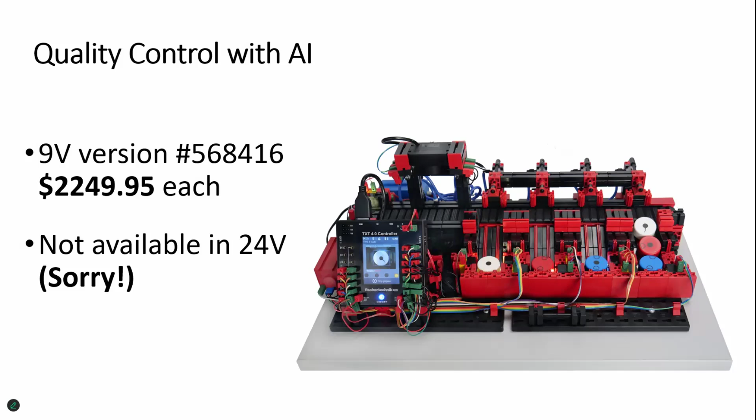The quality control with AI model that we looked at, again, 9-volt version only with the TXT controller, which is pre-programmed. You're looking at a cost of $2,249.95 per unit.

The Agile Production Simulation. This is a 24-volt model only. It includes 5 Siemens S7 1200 PLCs, 3 TXT 4.0 controllers, plus again, it's programmed. You're ready to go there, and it includes the digital twin with the digital learning platform. Your cost for this is $28,174.95. And again, you want to lock this in before the tariffs start affecting the pricing, which they will be on the next shipment. So if this is something you're interested in, please ask for your quote now.

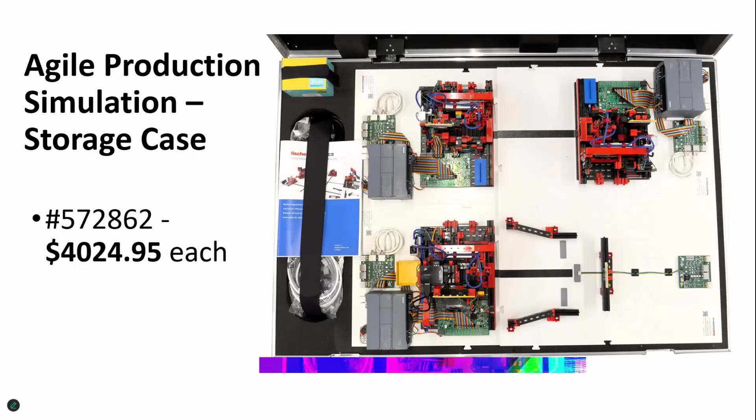Just getting the specifics of the case, it has aluminum case maker profile with plastic plates. Each of the 2 separate case sections has steel tilt handles and angle protection corners for additional stability. There are also straps and internal zipper pockets for storing the cables, the cords, the workpieces, any other accessories. The lower section of each case is lined with hard foam again, while the upper sections have soft foam to help cushion the various work sections while in storage. So again, the cost for that is $4,024.95. There are a couple other things we'll mention real quickly here, very briefly.

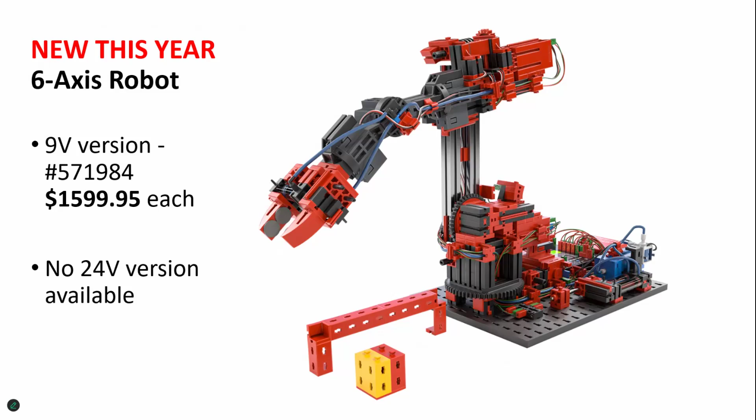First off, the 6-axis robot, which we touched upon before, which was incorporated in the APS model, is available as a 9-volt standalone version at this time. The cost on that is $1,599.95. It comes with the TXT 4.0 controller, not yet a 24-volt version available.

There are two new 24-volt versions that are available now, and these are to replace some of the outgoing models I mentioned before. The first one is a production line simulation. It is available in a 24-volt version, again, requiring the PLC and the programming. The cost for that is $1,599.95. This does come with access to a PLC programming course with its own variation of a digital twin, so that's a nice little feature and a great cost point for that.

There's also a bending machine. Also 24-volt version requires the PLC, but in this case, there is again a PLC programming course that comes along with this, and again, a variation of a digital twin.

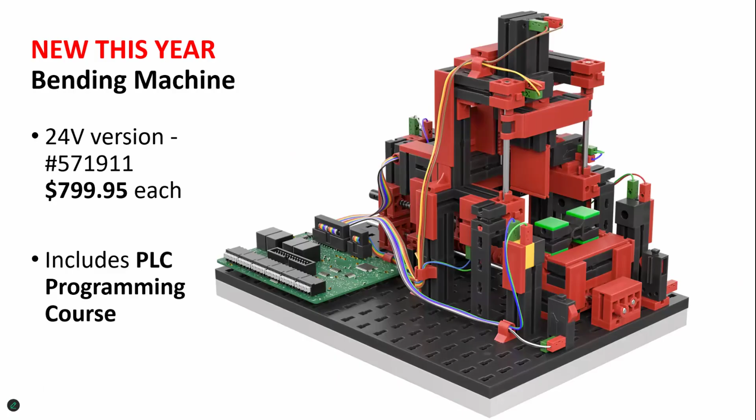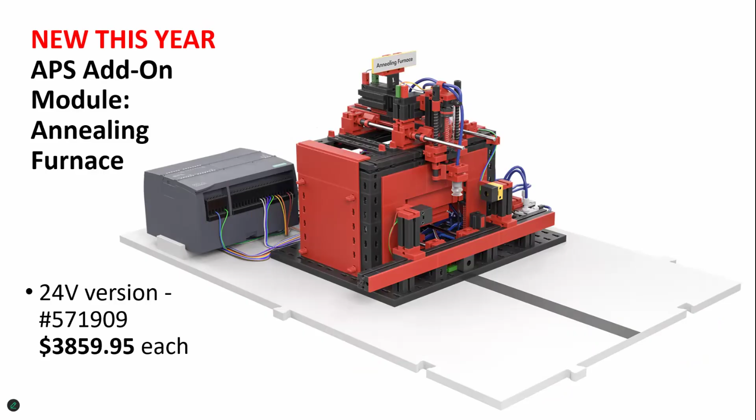And there's also an add-on module if you want to expand the factory itself. This one is an annealing furnace. It does include, as you see, the Siemens S7 1200 PLC that ships with that, and your cost for that 24-volt version only again is $3,859.95. And I will mention that these two APS add-on modules are designed only for use with the APS. You wouldn't purchase these as standalone modules. They are designed to work that way.